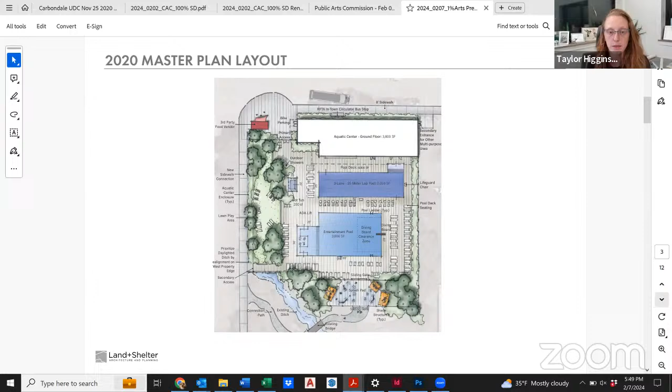To give you a snapshot on the budget, the original 2020 master plan cost estimate was around 7 million. The bond was a little higher, $8 million, to give some margin in the budget and funds available for the project. That was in 2020. Then in 2022, post-pandemic, the construction industry exploded, and project pricing has more than doubled in the last couple of years.

That's just to say this project has been constrained by budget pretty significantly. The current scheme has an approved budget of $11.6 million, which is higher than the original bond obtained for the project. So council, I'm sorry, the Board of Trustees, is looking at other ways to fund this, and has agreed to the 11.6 all-in budget number.

That includes 20% in contingency, fees, soft costs, furniture, a lot packed into that number. The $8.3 million budget within that is the actual hard cost for construction, which is what we'd base the 1% for the arts on. As part of the schematic design pricing package we issued last week, we've carried the design far enough to get another round of pricing that's more accurate to the actual project, hopefully confirming we can hit that number with as much scope intact as possible.

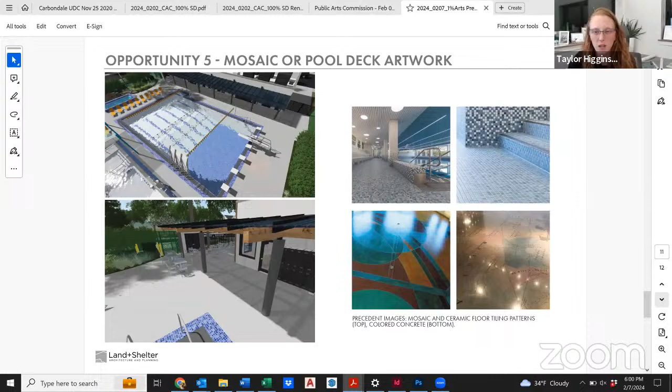And then this is the last one. Heather, do you want to speak to this one? I can, yes.

All of these opportunities, 1 through 6, also have a variation in their staying power. This would be one of the most ephemeral in our mind. So if it was an artist brief, we might say your installation needs to last 2 to 3 years, something like that, and then we could see that transitioning over. Right now we're looking at pricing, maybe not just a standard chain link, but there might be a color to it.

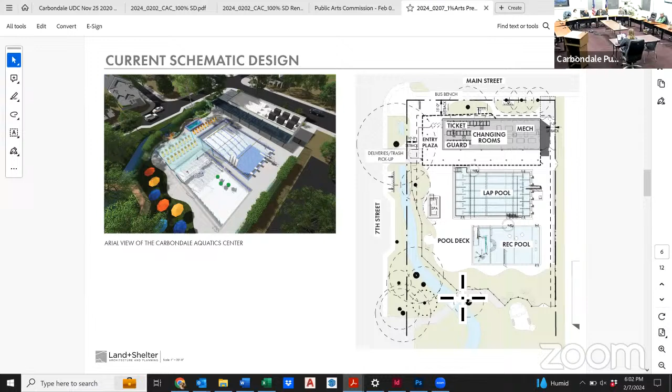You walk in, there's pretty much a whole stretch as you enter Sopris, and this whole area that faces out. From inside the pool, behind this whole stretch here is all chain link, and then this edge again that faces Sopris. We'll be able to do vegetation along the ditch, so hopefully we hide or just screen a little bit of that, but there's a lot of chain link, a lot of fencing. So that's the last opportunity.

Yeah, so I think we'd love to get your guys' feedback and just sort of hear what you think about the options we presented, and also what kind of next steps need to be for our process for really moving some of these ideas forward.

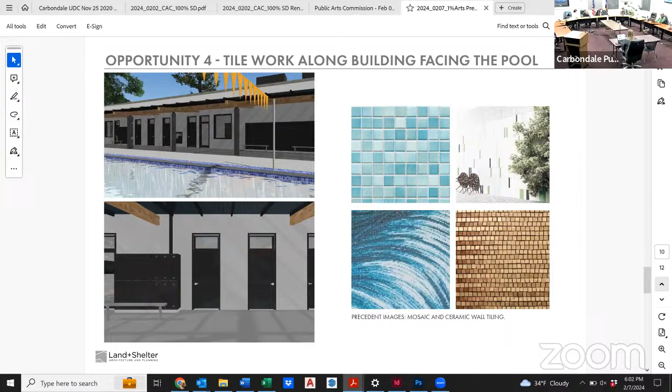Well, thank you for sharing all that. I feel like it's obviously a complicated project that's had a lot of history, so thanks for sharing kind of how we got to where we are, and some of the challenges, and looking at these opportunities is just great. I have some questions that maybe we can start off with, and then open it to everybody else's questions.

Some of my initial thoughts are, you have ideas, so what are you really looking at in terms of, you're going to do this no matter what as part of the pricing you're already pursuing, or how are you looking at where that 1% piece is really going to be focused? Is that an opportunity not for the architectural design team to be involved, but really bringing in an artist to have some of that more creative input on that piece?

You want me to take a first shot, Taylor? Yeah, go for it. Okay, so the 83,000 is budgeted, and then this was this first identification of opportunities. So the answer to your question would hopefully fall out of our discussion for the next few minutes, because I think we've tried to not make too many assumptions. We know we can't do all 6.

Gotcha. So what resonates? What do we like? Where are the places where it feels like the artist would best integrate versus, oh, that might be a budget best spent by the architectural design or the landscape design or something like that. We can't do all 6, I will tell you that. I mean, not for the 83, from just instinct of that.

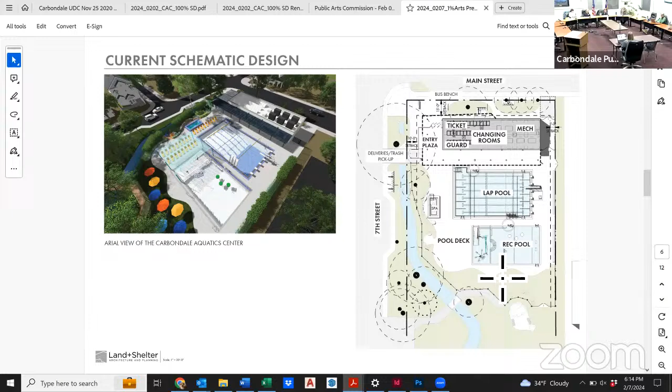Is there one of the six opportunities that stands out to everyone, in terms of the posts or the wall on Main Street? Of the posts and the fence, I think those are... it's not a huge budget, so I'm not sure how far it'll go.

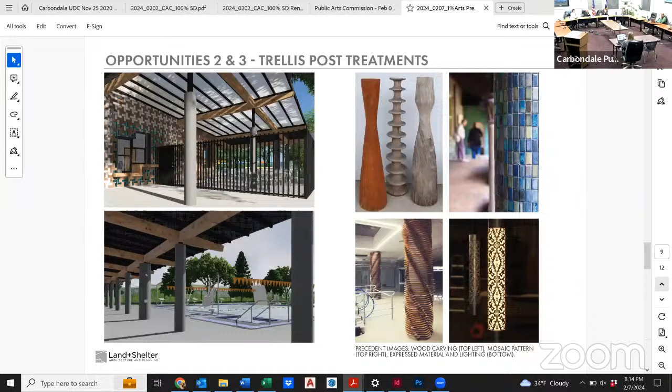Can I ask a question? This is Lori. Yeah. I'm just not sure, and I'm sure you guys can answer the question.

I thought that the money that CPAC was getting from the 1% fund, I didn't realize it's being put back into the project. I thought it was just kind of a payment to CPAC to do whatever they would choose to do with that money at some point in time. But it sounds like the intent is to take that money and put it back into the project, although that's not really required to happen.

Is that true? I think the way the resolution is written is it's to be used on site for the project. If it's not used, I think up to 15% can go to a general fund, like the existing 1% account, and then if that happens, it can be used elsewhere. But I think the intention is that 85% would be maintained for art on the site.

Okay, thank you. Yeah, I have the resolution here and I can find the exact language where it may call that out specifically, but that is, I think, the understanding I've been operating with.

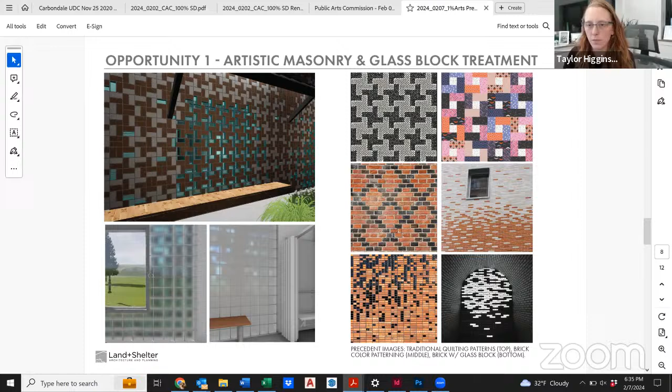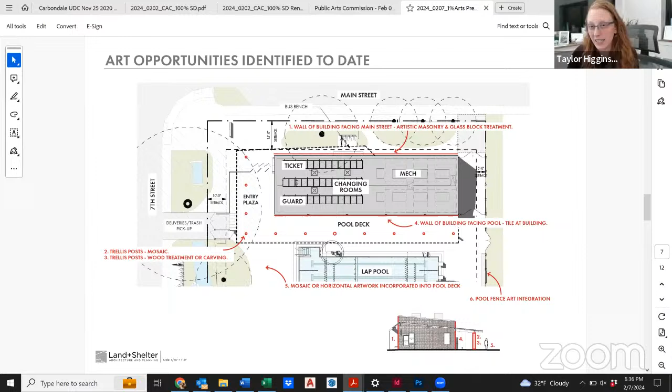One thought I have is the wall that's the height of the building, and then the parapet covering the things on top - those outer layers don't have to be the same. That could be interesting, like starting to pull the edges away, so the brick edge would expose part of the CMU wall behind it. It's like you're seeing part of the box, and it really starts to disintegrate at the edges or something.

Awesome. Well, it sounds like unless you guys have anything else, we have what we need to take the next pass and come back with what we think makes the most sense.

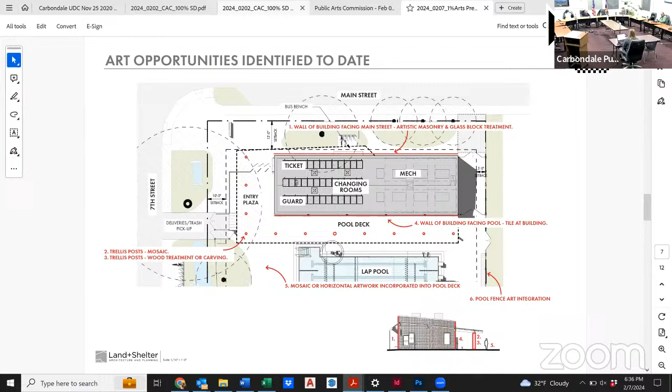That's great. I really appreciate you guys sharing that and thinking about integrating art and artists early in the process, and already having some really great ideas. The resolution is really clear that art is interpreted very broadly, and I think landscape architects and architects are artists in their own right.